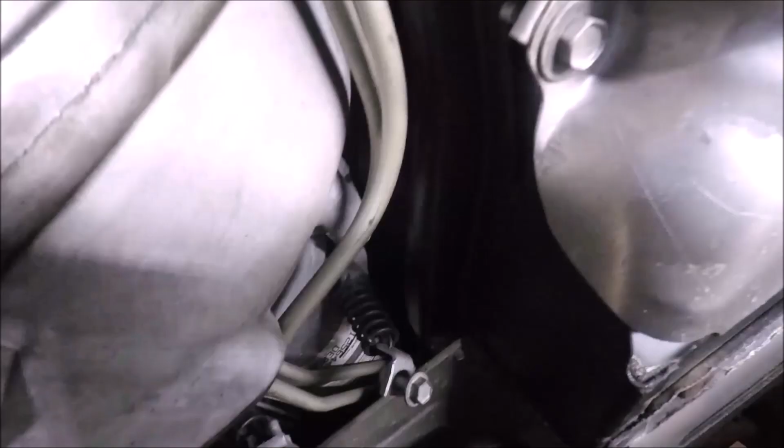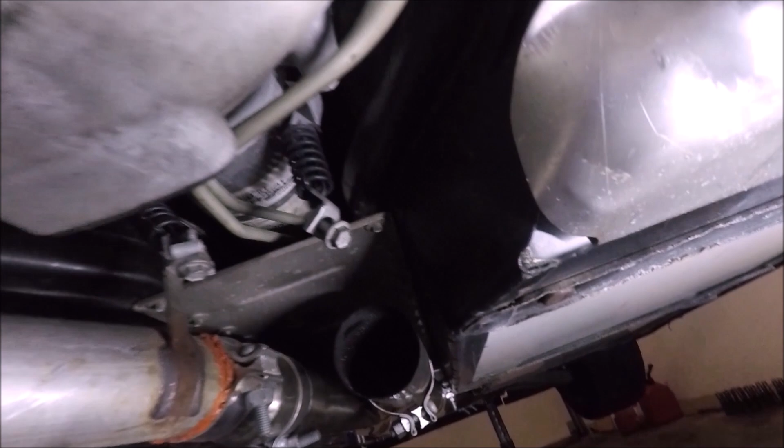So here we are, guys. We had 50 people on the internet saying it couldn't be done. We had one guy that said it could. I tend to side with the minority, because if 50 people say something can't be done, it usually just means that they heard it can't be done. And the one guy who says it can be done is usually the guy who actually did it.

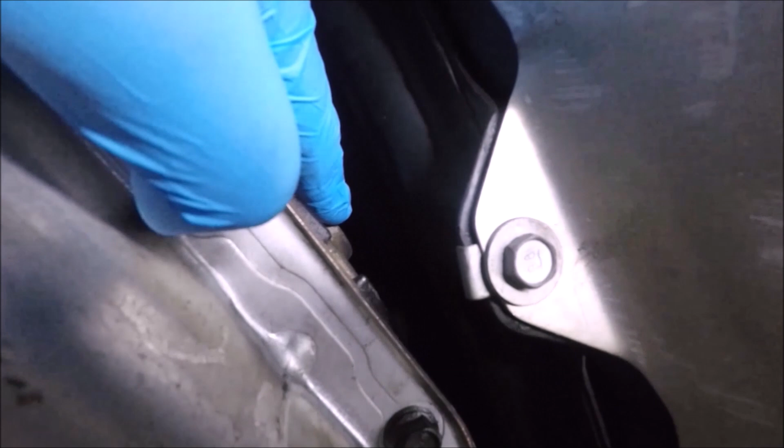So here we are. I have taken off the passenger side exhaust, the intermediate pipe that goes between the X-pipe and the over-axle exhaust. I took that one pipe off, and you can see the servo right here. I don't know if you can tell, but here's the servo, here's the frame, servo, frame.

So I'm gonna try it, guys. I'm thinking maybe I can get it off one piece at a time, same scenario as when I did the main shift kit video. I'm not going to be able to hold the camera while I'm doing this, but basically what I'm going to do is take a pry bar and stick it in here and try to push this cover in. You don't have to push it in much, just like that.

And then, I hope you guys can see it, but when I push it in there's a clip right here, a circlip that goes around the whole thing. I know it's really hard to see here, guys, but I just got to get a screwdriver under that and pop it out. The servo cover will come out so far. Then there's a rubber O-ring around it. We're going to grab our rubber O-ring with this hook, pull down on it, and hopefully pop the cover off and take all the servo parts out.

You can see I was able to get the circlip out, pried the cover out a little bit, and reached in with my pick. Now what I'm going to have to do is pull down really hard on the O-ring, which is going to thin it out since that's the only thing holding the cover in right now. So I'm going to pull down on the O-ring with my pick like that, and at the same time grab a pair of pliers and hopefully pull the cover off.

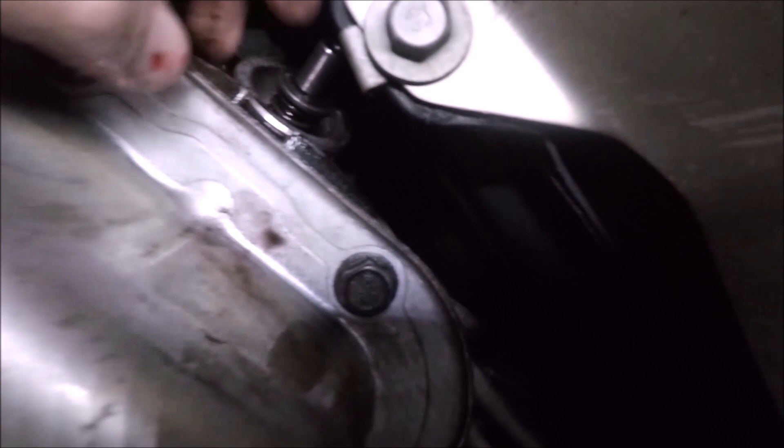The pin is too long, it hits the frame, and it doesn't matter which way I twist it, I can't seem to get the clearance I need to remove it the rest of the way. So what I'm probably gonna have to do, guys, is pull my little C-clip or circlip here while it's up here in the transmission and take it apart piece by piece. And there you go, guys, it's all out.

Kind of goes back to what I'm always saying. A lot of the times on the internet, people will read something, they won't even try it themselves, they just regurgitate what they heard. This is one of those cases. I must have read 50 people saying that you cannot get this out with the transmission still in the car on these C5s, and here it is, guys. I just got it out.

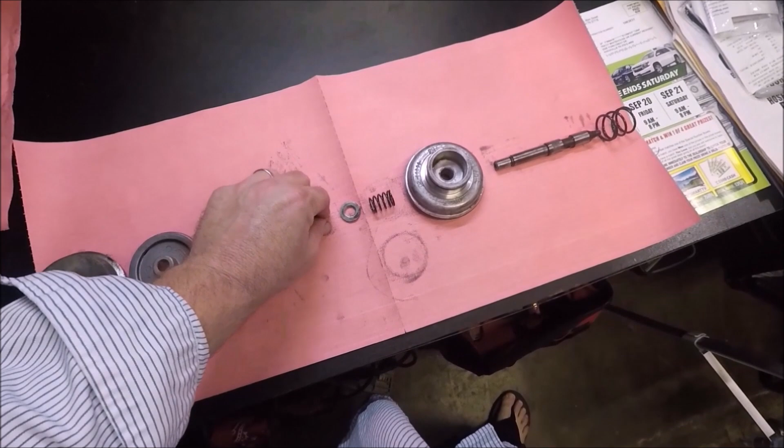Now, that being said, I had to pull this clip. I was able to get the cover and these two pieces off, but I had to pull this clip and remove this piece before I was able to slide the pin out and get it the rest of the way out. So that's going to be kind of an issue, because going back in, I'm going to have to try to compress all this and put this clip on while it's in the vehicle. Can it be done? Sure, but it's probably going to be an aggravating task.

But what I'm going to go ahead and do, I'm going to get all these parts cleaned up. I'm going to get the remaining components of our shift kit back out, and I'm going to show you how to put this together, and we'll just call this an amendment to the original shift kit video, since I didn't get to do this in that video.

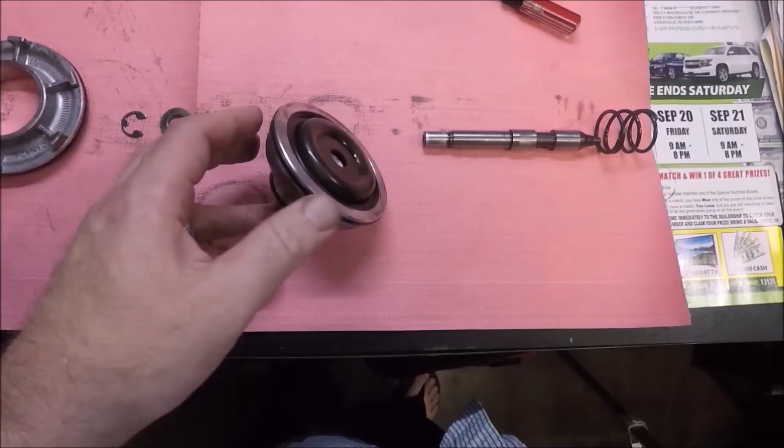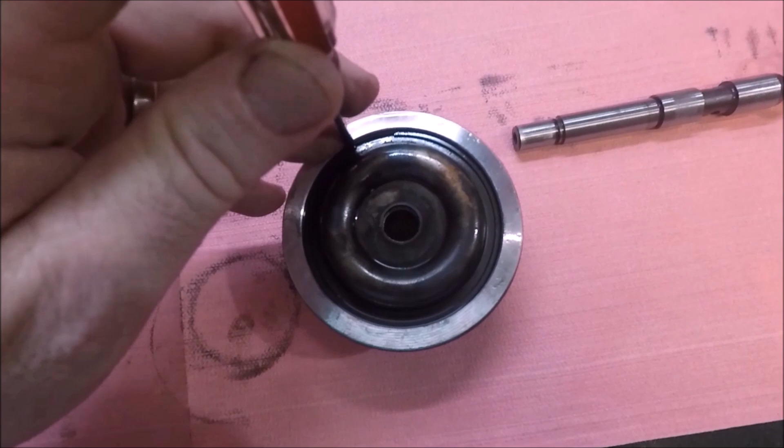Before I clean the parts, we have to take this apart, and if you look down in here, you're going to see there's just a little C-clip that goes around here, and that's what holds these pieces together. So what you're going to do, like I said, I don't have anybody hold my camera, but you're basically just going to take your screwdriver, stick it in here and pry it up and around, and then you'll be able to take this apart.

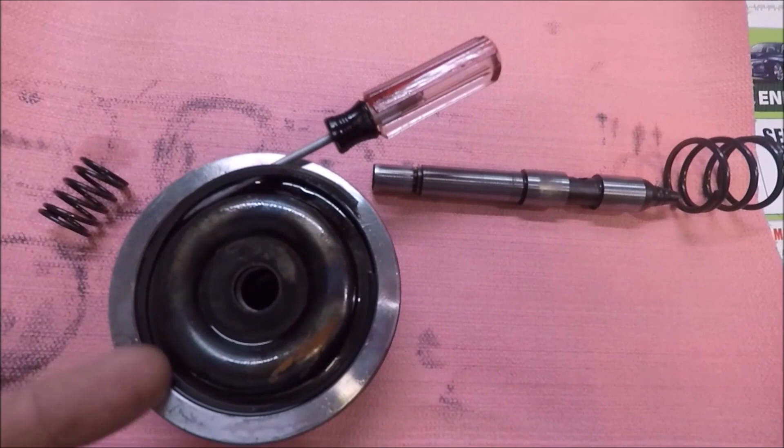Just to show you, there's a dimpled edge for you to get your screwdriver in, and you can see how I'm wedging the screwdriver in, and I'm just going to keep pushing the screwdriver around. It's going to pop that circlip out. Once that's out, you pull the cover off, and a lot of the times there'll just be one spring. In my case, I'm guessing because it's a Corvette, it's got two springs in it already.

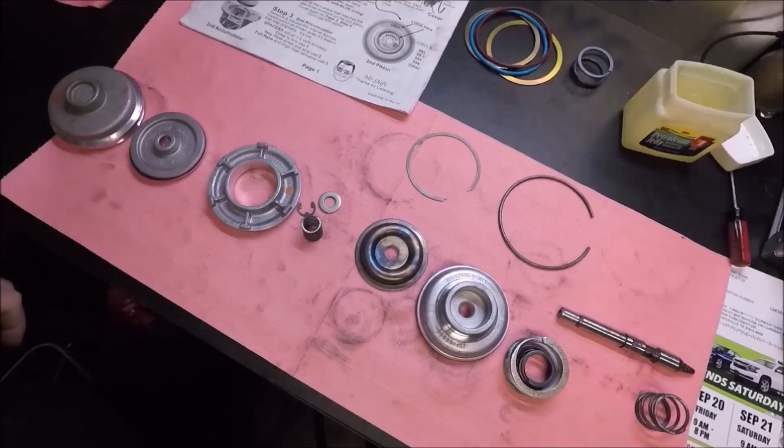Alright, guys, so we're going to try to put this thing back together now. So we got this guy here. Originally, it came with these two springs here in it. Some of them will only have one spring. Mine, I don't know if it's because it's a Corvette or what, but it had two. I actually called Transgo today, asked them a bunch of questions about this kit. This was one of them.

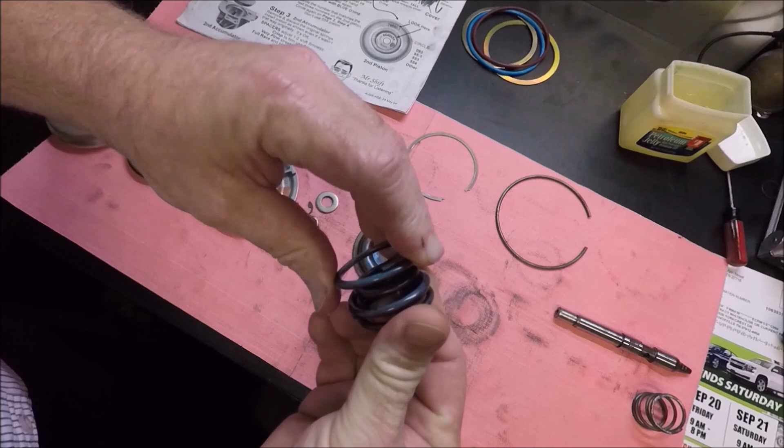I actually saw in another video online where the guy had stacked the new spring on top of this little spring and put all three of them in. The Transgo rep said do not do that. He said if it had two springs, to remove the small middle spring and put their spring in. So this is the blue spring out of the shift kit. So we're just going to put it in the middle of this spring.

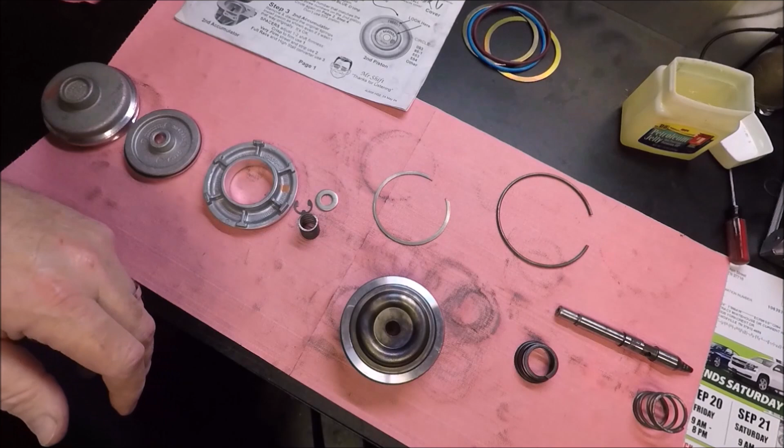So with that in there, we're going to take our cover, put it back on here, and then we've got to get our little circlip retainer put back in here. Now this needs to be compressed. If you've got a really strong hand, you might be able to do it. I'm going to use one of these clamps here. I think I got this at Harbor Freight. It's just a wood clamp, guys. We want to clamp this down until we can see our groove.

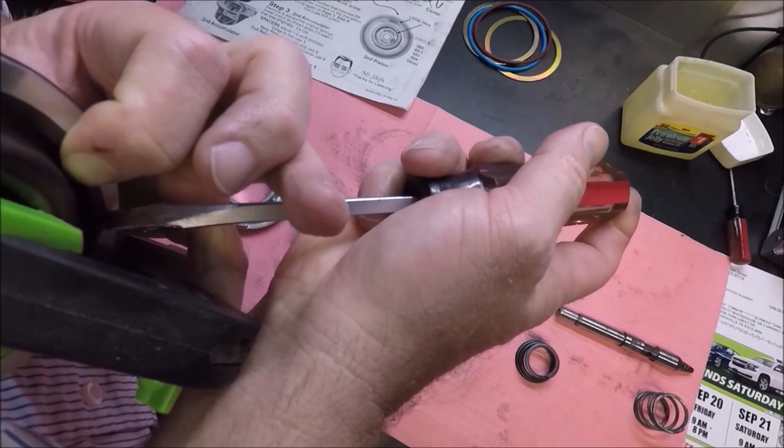And we're going to take our little clip here. We're going to stick it in one end of the groove to get it started, and just compress it and work it around the groove. Take a screwdriver to try to get this last little bit in. Just make sure it's in there.

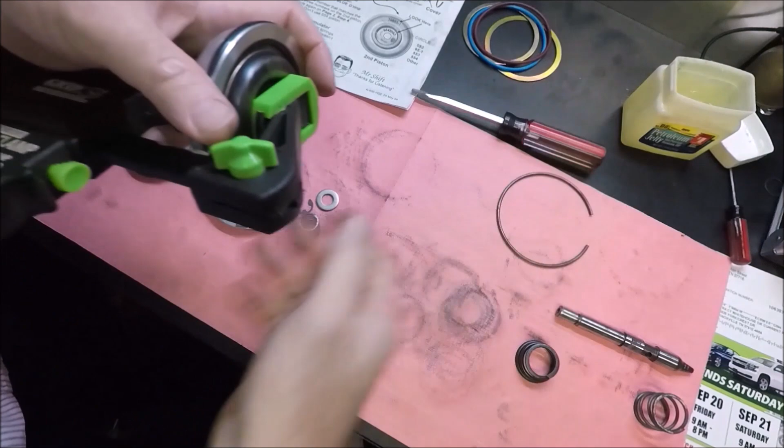Oh, there we go. Just making sure it's seated in the groove all the way around. Then release the clamp. There we go. Now I'm going to take some Vaseline and lube my seals up here. Got the big one, and we got our little one here.

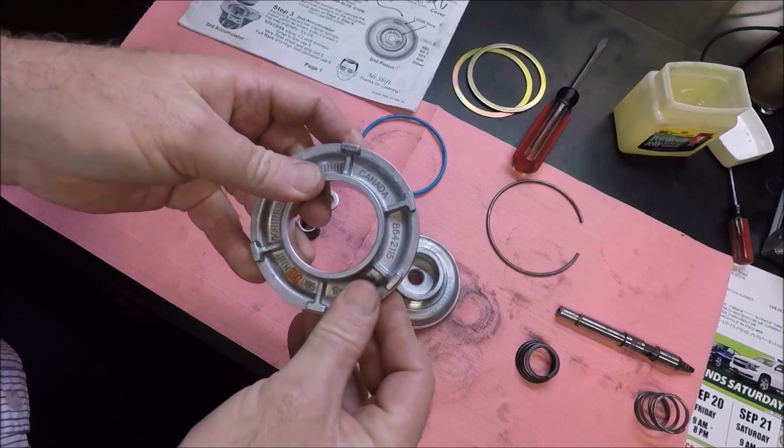Our Transgo kit comes with a couple new O-rings. You've got a red O-ring that goes on this guy. Just like that. And the blue O-ring goes on your cover. We're going to take some Vaseline and lube both of these up too. This is just going to make sure the O-ring slides in easy, and you know, we don't cut the O-ring or anything that could cause it to leak.

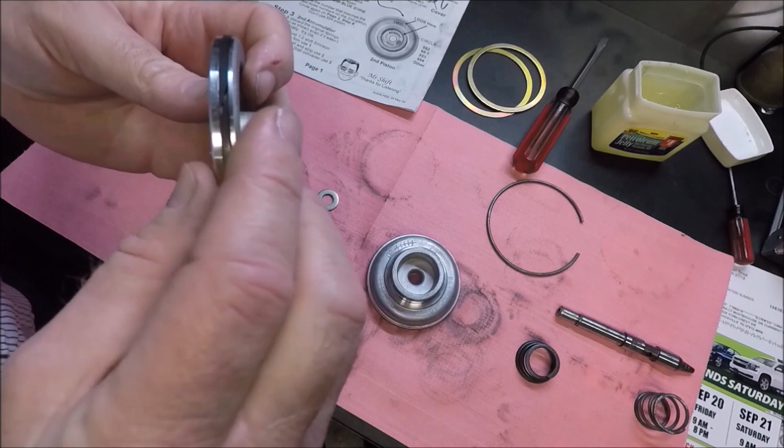Last but not least, we've got this guy right here. We're going to do the same thing. We're going to put some Vaseline on him to hold all the seals in place. Put a little on the end there and just lube it up. Now here's the thing, as I've already mentioned, I'm probably going to have to put this back in one piece at a time, since I'm not going to have a camera under there to show you that process. I'm going to show you how this all goes together right now.

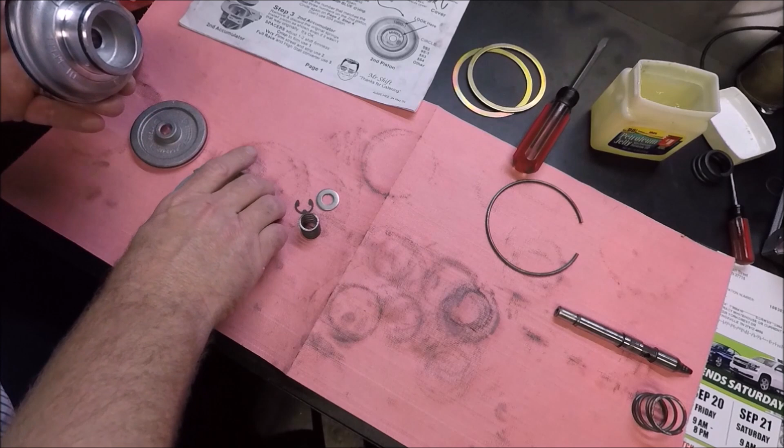So we've got your second piston right here. This guy right here, your housing, it slides on it with the tabs facing this direction, just like that. Then you've got your pin right here. We're going to lube him up a little bit. He's going to slide through that hole in the center, just like so. This spring that goes on here, this washer that goes on top of the spring. Then you compress it down and you put your E-clip in. And it just snaps in just like that.

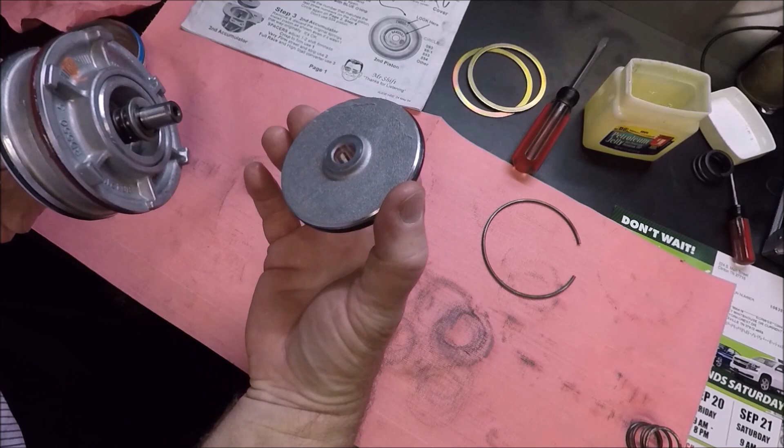So that puts this together, and after that you've got this, which is going to slide over this with that valve facing towards the cover, and then your cover is going to go on over this, and your snap ring of course goes in to hold your cover on. Now, shims. The shift kit comes with 2 shims. This is to adjust your band tightness.

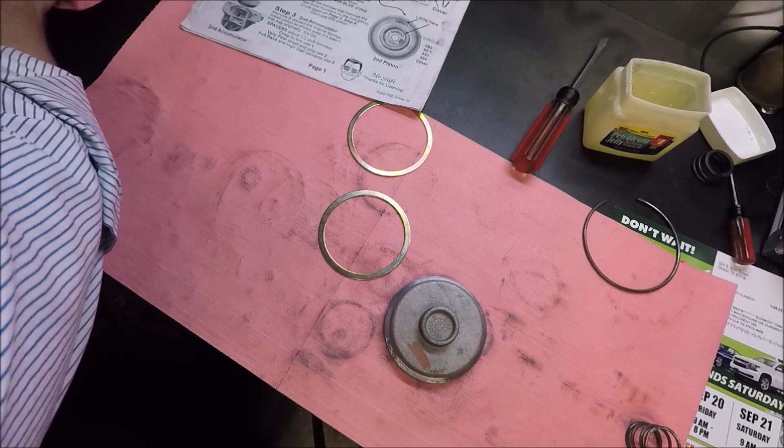A lot of people, I've been reading up on this, and a lot of people say you don't need any shims if you have a fresh build. If you've got, you know, a few miles on it, you're going to want to use 1 shim. And if you've got a lot of miles on it, you might need to use 2, but I have yet to see anybody that said 2 shims was necessary.

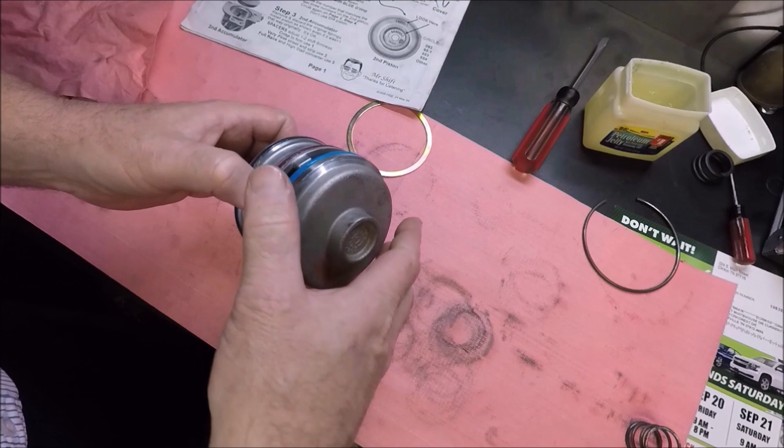So here's the thing about these shims, guys. You really can't put this on ahead of time. You've got to kind of get this in the transmission. Then you're going to have to set your shim in there, and then do your cover over the shim, because that shim is spacing the cover out, and it's forcing this whole assembly deeper into the transmission. And that, you know, tightens up your band, or at least tightens up your band clearances.

So anyway, you've seen how I did this. Now I'm going to try to get it in one piece like this, but most likely I think what I'm going to have to do is pull this apart. I'm going to have to set this all in a piece at a time. Oh, and don't forget this spring goes in here on the inside. Sorry guys, I about forgot about that.

But I think I'm going to have to put this in like pin first, and then put this on top, and then slide this guy on here, and then, you know, so on and so forth with it in the transmission, because I don't think I have enough clearance to put even this assembly in the transmission. But you've seen how it all goes together now, so I'm going to go stick it in there, and hopefully we'll be back with the test drive.

So the shift kit is finally in. We got our servo in, and before we go on the test drive, I just want to kind of talk to you guys and tell you what was going on. So I did test drive it after initially getting the shift kit in, and it did seem to quicken the shifts up a little, but second gear still felt a little mushy. So that's why I went back and decided to try to do the servo. I'm thinking maybe that band just wasn't grabbing well, and that's what was causing the problem.

So what I'm looking for now, I'm going to do a couple short pulls at light throttle, some at medium throttle, and then a couple at wide open throttle, and see how it shifts. What I'm hoping for is a really firm shift at wide open throttle and just a quick shift at part throttle and mid throttle, so, you know, the wife's still happy with it when she drives it every day. That's pretty much it.